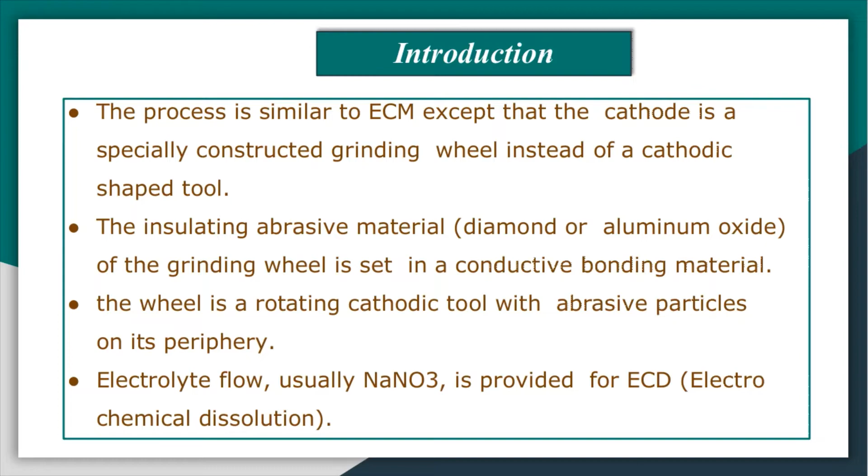In this technique, it utilizes a negatively charged abrasive grinding wheel, electrolyte solution, and a positively charged workpiece. As I have shown in this figure, you can see the grinding wheel is there, the electrolyte is there, and the workpiece is there. The process is similar to electrochemical machining, except that the cathode is a specially constructed grinding wheel instead of the cathodic shaped tool like the contour to be machined by electrochemical machining.

The insulating abrasive material, that is diamond or aluminum oxide, of the grinding wheel we have to set in a conductive bonding material. In this technique, the non-conductive abrasive particles act as a spacer between the wheel conductive bond and the anodic workpiece. Depending on the grain size of these particles, a constant inter-electrode gap, that is IEG, of 0.25 mm or less, through which the electrolyte is flushed, can be maintained. So we have to flush out the electrolyte in between that gap.

The abrasive particles continuously remove the machining products from the working areas. So in this machining system, the wheel is a continuously rotating cathodic tool with abrasive particles of 60 to 320 grit number on its periphery only, and electrolyte flow, that is NaNO3, we have to provide for the ECD purpose. The wheel rotates at a surface speed of 20 to 35 meters per second, while current you have to maintain between 50 to 300 amperes. So this is about the basic working principle of electrochemical grinding.

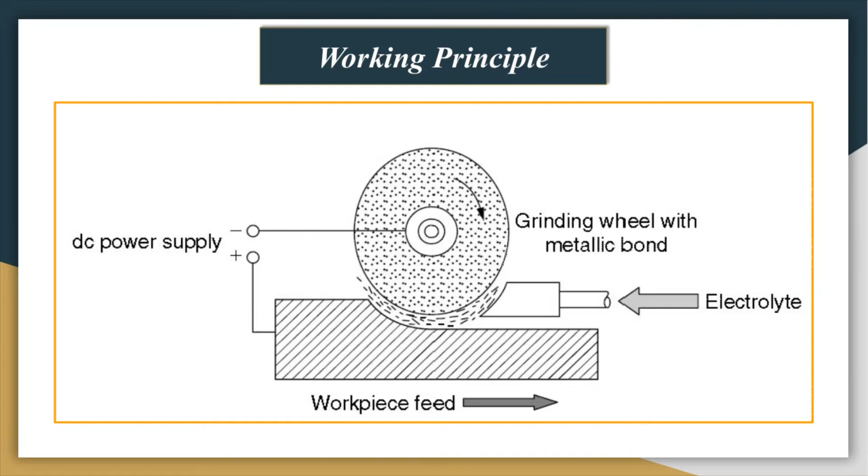Okay, let us move to the electrochemical machining system. When a gap voltage of 4 to 40 volts is applied between the cathodic grinding wheel and the anodic workpiece, a current density of about 120 to 240 amperes per centimeter square is created, and the current density depends on the material being machined, the gap width, and the applied voltage. The material is mainly removed by ECD, while the mechanical abrasion of the abrasive grits accounts for an additional 5 to 10% of the total material removal.

So removal rates by electrochemical grinding are 4 times faster than by conventional grinding, and electrochemical grinding always produces burr-free parts that are unstressed. The volumetric removal rate, VRR, you will typically get up to 1600 cubic millimeters per minute. So this is the volumetric removal rate you will get from electrochemical grinding.

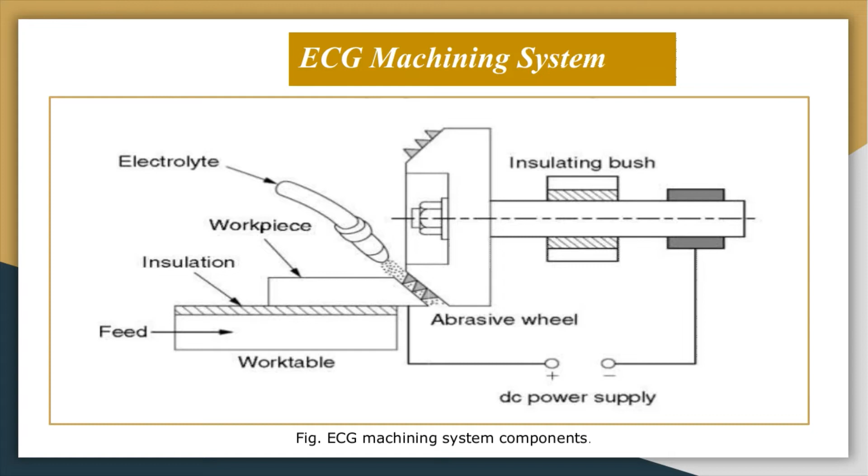In the machining zone, there is an area of simultaneous electrochemical dissolution and mechanical abrasion of the workpiece surface, where the gap width is very small, about the height of the grain parts projecting over the binder. Another area of pure electrochemical removal, where the abrasive grains do not touch the workpiece, exists at the entry and exit sides of the wheel.

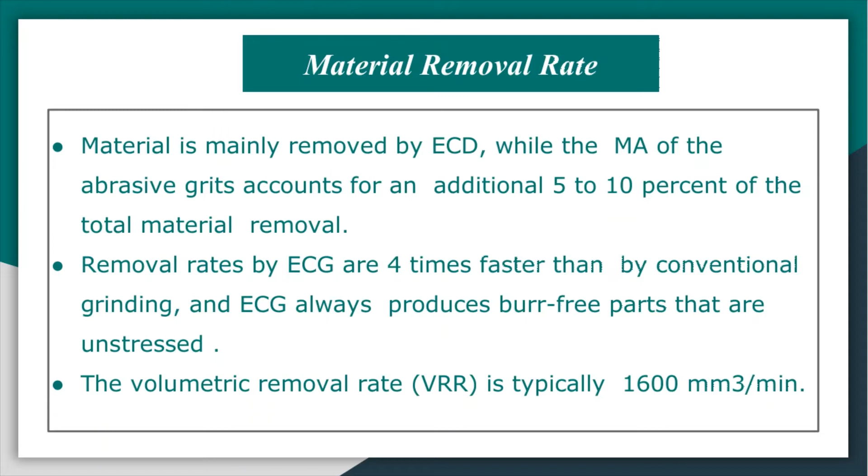Now, the increased performance of the electrochemical grinding process results from the interaction between mechanical abrasion and electrochemical dissolution and changes in the surface layer properties of the material in the machining area. Increasing longitudinal feed rate and wheel speed and decreasing voltage result in a smaller gap width and consequently an increase in the mechanical abrasion contribution to the EMRR process.

Decreasing the feed rate is followed by a considerable reduction in the cutting process, down to values near zero at the transition to pure electrochemical dissolution. So this is about the machining component. So for electrochemical grinding, we require the electrochemical dissolution phase as well as the mechanical abrasion phase.

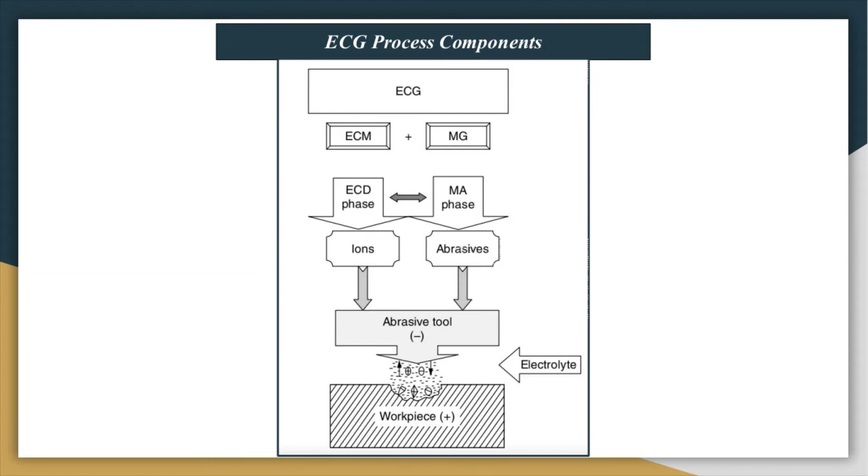Now, the machining condition at which the mechanical abrasion disappears depends on the electrical parameters, the electrochemical machinability of the material in the given electrolyte, and the grinding wheel features, especially grain size and height. So generally, slow feed rates produce large overcut and poor surface finish and wider tolerance, while excessive wheel wear occurs as a result of a feed rate that is too fast.

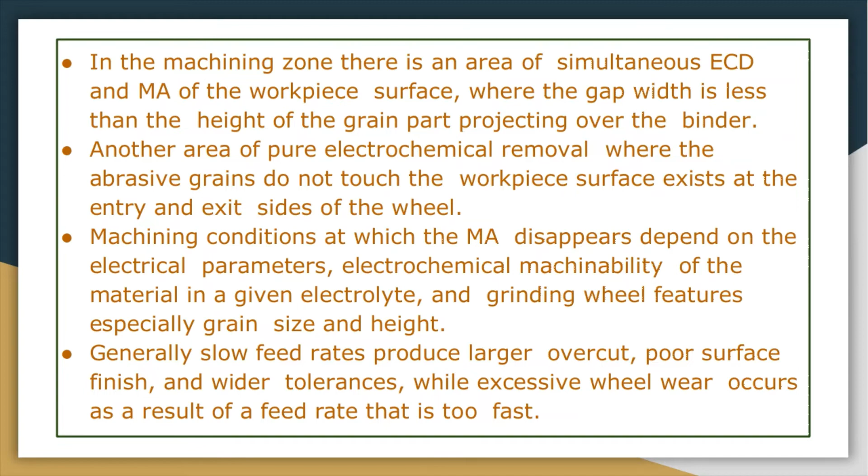Okay. Now we have finished the discussion on material removal during this process. Now we'll discuss the accuracy and surface quality. Traditional grinding removes metal by abrasion, leaving a tolerance of about plus minus 0.003 mm and creating heat and stresses that make grinding thin stock very difficult. In electrochemical grinding, however, production tolerances around plus minus 0.025 mm are easily obtainable. Under special circumstances, a tolerance of plus minus 0.008 can be achieved.

The ability to hold closer tolerances depends upon the current, electrolyte flow, feed rate, and metallurgical properties of the workpiece itself. Accuracies achieved are usually around plus minus 0.125 mm, and the final cut is usually done mostly by the grinding action to produce a good surface finish and closer dimensional tolerances. It is recommended that lower voltage be used for closer tolerances, for reduction in overcut, sharp edges, and bright surface finish.

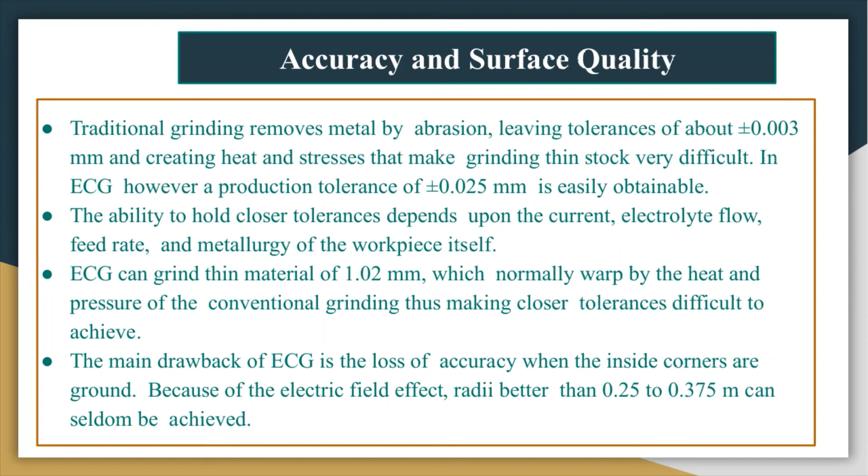Now let us discuss the applications. The electrochemical grinding process is particularly effective for machining parts made from difficult to cut materials such as sintered carbide, creep resisting Inconel or Nimonic alloys, titanium alloys, and metallic composites. Then applications similar to milling, grinding, cutting off, sawing, and tool and cutter sharpening. Production of tungsten carbide cutting tools, fragile parts, and thin walled tubes; for that also we can go for electrochemical grinding.

Removal of fatigue cracks from steel structures under seawater. In such applications, holes about 25 mm in diameter in steel 12 to 25 mm thick have been produced by electrochemical grinding at the end of the fatigue cracks to stop further development of the crack and to enable removal of specimens for metallurgical inspection. It is also used for producing specimens for metal fatigue and tensile tests, and machining of carbide and a variety of high strength alloys. The process is not adapted to cavity sinking and therefore it is unsuitable for the die making industry. So these are the applications of electrochemical grinding.